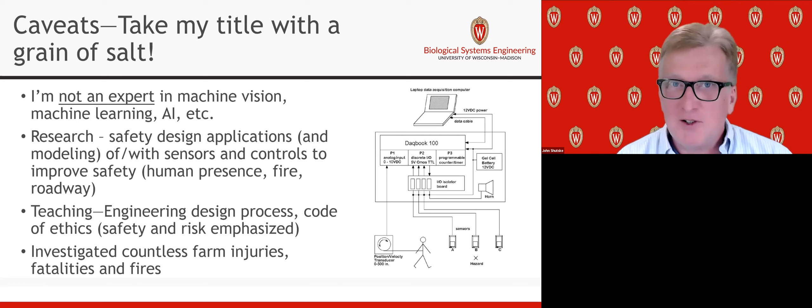I've also done some teaching in the design process. I have been teaching our capstone engineering design as part of our ABET accredited program up here. That includes safety and risk assessment, and we try to follow the engineering code of ethics where safety and risk is heavily emphasized. And maybe most importantly, I've investigated literally thousands of farming injuries and fatalities, and in the case of fires, probably about 4,000 combine, tractor, cotton picker, and sugarcane harvester fires. So if you ever need somebody to talk about machinery fires, you could Google that topic and you'd probably find my name.

So that's my caveat. In the outline of my presentation today, I am going to talk about some of the driving forces that are moving us towards more automation, high automation with agricultural machinery.

Some of these you've heard. I actually watched one of your previous speakers, and you're going to see some of the same coverage. I will try to be relatively brief in that. What I really want to focus on is the understudied barrier that I think safety is, and the safety not only for operators, but for other people who are stakeholders with highly automated agricultural machinery.

I'll talk about risk assessment and control, in particular as it relates to the many, many new standards that are coming into the marketplace through groups like ASABE and the International Standards Organization. I really want to also talk about the fact that when we talk about safety and identifying and evaluating hazards, we need to think beyond just the obstacles that we might find in a defined agricultural or farm field. Many of the standards that we are developing actually specifically exclude some of these hazards, which I think is actually maybe a bigger deal than obstacles in fields.

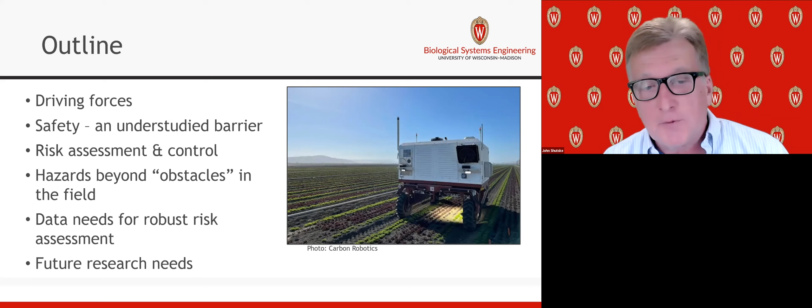I'll talk about some of the data possibilities for doing more robust risk assessment, and then finally wrap up by talking about some of the future research needs, and actually just kind of foreshadow a little bit. Salah and I are planning a conference here for probably the month of November of 2022, and I'll talk briefly about that. So let's begin by talking about these driving forces.

I think many of you have heard of the whole notion of having to double global agricultural production between the year 2022 and the year 2050. So that's what, 28 years. We're going to have to double production on the basis of three main driving forces. Number one is population growth. We currently stand at about 7.9 billion global citizens. That number is going to grow to something close to 10 billion by the year 2050.

The other thing that we know throughout recorded human history is that as people get more affluent, as they have more disposable income, they demand a higher quality of protein. And right now that's most likely to mean animal protein. And then the final driving force is the use of agricultural products for energy and biomass production, those sorts of things. All of this is going to happen while we face these major, major headwinds of things like water: too much water, not enough water, water in the wrong place, wrong time, water quality. And a lot of our water issues are obviously being driven by climate change.

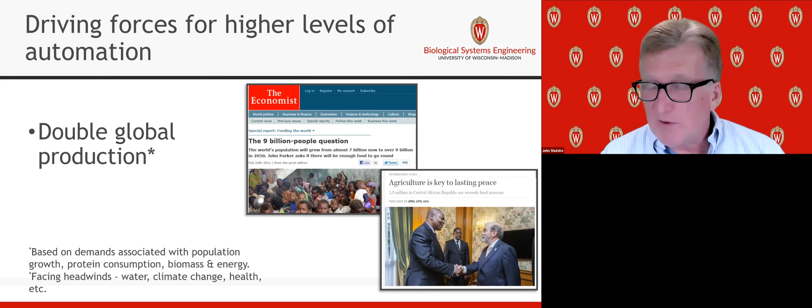And the other thing I want to just mention to you is the impact of more animals on the planet as a result of growing demands for protein also means increased probability of occurrence of different types of diseases, emerging infectious diseases, including things like pandemics and forms of influenza. So we face a number of challenges as we grow our population and double production.

Another thing right now, and I need to say this, my work is nested in Wisconsin in extension under the umbrella of farm management. And right now, probably our biggest farm management issue is this labor shortage that I don't see letting up anytime soon. Interestingly, that is a mix of demographics, changes in our rural communities, the perception of agricultural work, and also, frankly, immigration policy. So a lot of different forces there.

The big driving force that motivates me probably more than anything is the notion of safety, prevention of injuries. Salah and other people are quite familiar, I'm sure, with the concept. We have a hierarchy of controls. When we look to prevent people from getting harmed or killed as a result of exposure to the farm workplace, the safety hierarchy suggests to us that the more we can do to take people out of the equation, isolate people from hazards, that would include agricultural machinery, we're going to have more success at reducing the burden of injuries and fatalities on farms.

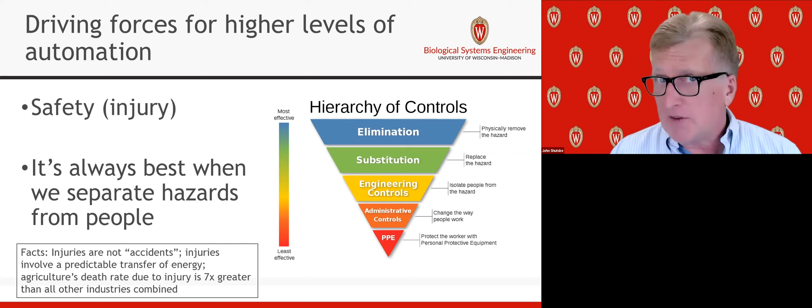But the reality is when we have so many people being killed and injured on farms, those deaths and injuries are a result of a transfer of energy, which is really the responsibility of engineers to control and harness energy for good and to protect people from the bad aspects of it. So I think our terminology and the way we think about these issues is quite important, especially when we think about the fact that agriculture's death rate is 7 times higher than it is in all other industries combined.

We do need to be a little bit careful about this. I believe looking at the ethical aspects, there are a lot of considerations and what I'll call countervailing forces. One of those is the farming culture. Every farmer I talk to in Wisconsin about autonomous or driverless equipment, particularly when we start talking about field operations, tractor, forage harvester operations, there are a lot of people who still really enjoy doing that type of work. Even though some of us might view it as monotonous or boring, it is still part of our culture in many parts of the country.

We also talk about engaging youth. I know that in my own circumstance, I won't mention a manufacturer per se, but if it wasn't for my dad's green tractors, his 4020, his 4240, his 630, and his A, I probably wouldn't have gotten as involved in agriculture, and I probably wouldn't have gone on to be an agricultural engineer had it not been for the machinery that was on our farm in Northwest Indiana. So engaging youth is really important, especially as we look at continuity and succession planning.

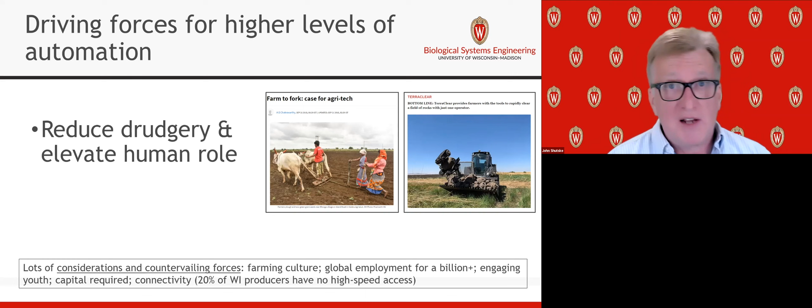There's obviously huge capital requirements, and there's the issues of connectivity. I'm going to highlight in a few minutes a survey that we did here in Wisconsin of over 1,000 agricultural producers. And still, even in a state like Wisconsin, we have about 20% of our farming operations that still don't have access to high-speed internet. So these are all things that I think are going to cause some limitations in terms of the growth and kind of be a countervailing force for those forward-looking trends.

The other one that I find particularly fascinating is, I'm sure some of you probably followed this over the last couple of years, and especially here most recently, John Deere has had a major presence at the Consumer Electronics Show. If you've ever attended that show, in most years, pre-pandemic, we're talking like 120 to 140,000 people, but the focus has almost always been around consumer electronics.

I mean, that's the name of the show, and yet John Deere is really moving toward educating the public, highlighting, creating excitement, as are other companies like CNH, who released their autonomous tractor concept vehicle at the Farm Progress Show, which I think was back in 2016, if I'm not mistaken. I think I first saw that machine in either Decatur or over in Iowa at the Farm Progress Show. So a lot of attention is being paid to autonomy. And I know that that's been one of the focuses of this series.

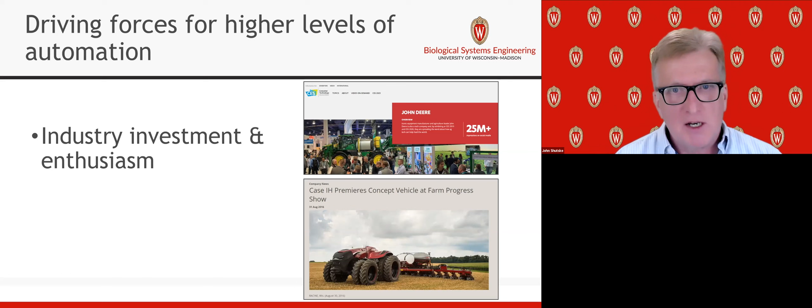As we transition towards looking at safety, I'm going to argue that this is an issue or a need that has been relatively unstudied and undocumented. We've done a lot of research in places like Wisconsin.

Before that, I spent about 17 years over in Minnesota working with injury epidemiologists, doing these really deep dives in literally looking at thousands of farm households and documenting their injuries and their other types of health and safety related issues. But most of that work has been looking backwards in time, obviously.

And when we look backwards in time from now, or from a lot of the work I did in the early 2000s or even in the 1990s, we're often still looking at old machines that may lack appropriate protective equipment, shielding, and those kinds of things. As we look forward, there are not a lot of people around the country who have been studying and looking at these issues of safety and risk with new equipment.

When I first began to write my Hatch project proposal, I think it was in 2017, I was pretty excited as I was doing Google Scholar and other searches to find a chapter in this book called Agricultural Automation. And there was to be a section in here on safety. So I got this book. I waited actually quite a bit of time to get it from CRC. And when I received the book, this is the coverage of safety in this book.

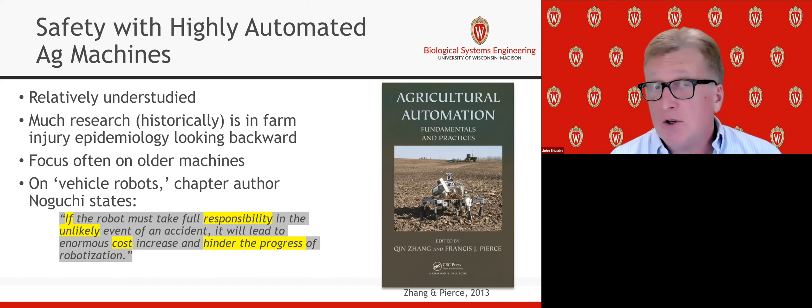I will agree that there will be a cost when injuries and incidents begin to happen. And in fact, yes, these safety related issues could hinder progress. I personally believe that safety and the confidence of not only the public, but definitely owners, operators, employees, people who are stakeholders, absolutely is going to be a driving force. And yet, again, as I suggest, it's something that has just not received a lot of attention here over the last many years.

If you look at some of the things that have slowed the progress, like with autonomous vehicles on highways, there have been a couple of fairly significant events involving Teslas, unexpected events that, looking back retrospectively, could perhaps have been preventable. This particular one is causing some issues with NHTSA, the National Highway Traffic Safety Administration, 354 complaints of random braking.

When we look at the regulatory issues, right now, there are not a lot of regulators that are paying attention to autonomous agricultural equipment. The one exception is California, where we are facing some major challenges. I don't want to quite say a stalemate, but I know that the industry is quite concerned about the direction that California goes. And part of why that's so important is because California is our biggest agricultural state in the country, and probably globally as well, a major, major factor. And I'll come back and talk about that in a few minutes.

But again, OSHA being an occupational safety organization, safety is kind of front and center in terms of their ability to adopt these pieces of equipment. I also want to just briefly talk about the side of policy, politics, and communication.

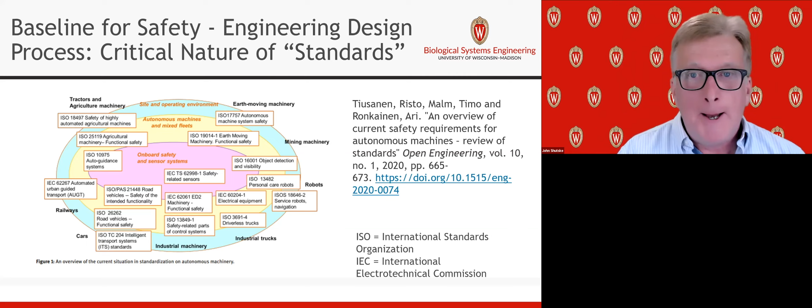We're actually in the process of beginning to inventory all of the things that are out there, paying close attention as these standards get developed, how they can be developed more effectively, how they can be improved. Some thoughts about standards and safety as it relates to autonomous equipment. Number one is that standards in engineering are developed through what we call a consensus process.

The idea of a consensus process is that anybody who would be considered a stakeholder, from the original design engineer who envisions a product all the way to that end user and everybody in between, people involved in financial decisions, insurance companies, the end user, workers, dealerships, people involved in maintenance activities, all are considered to be stakeholders. So just a huge amount of activity.

These standards, if you've ever dug into the details of an engineering standard, and I do this with my engineering senior design class, they're extremely thorough. They're extremely complex, but they also have to be written in such a way that they cover the whole spectrum of possible design alternatives and applications. And so finding content within a standard that applies to my specific application or some unique feature of my product in some cases is very difficult. They're also very densely written, and as a result can be relatively hard to apply.

And for those of you who are interested in outreach, extension, professional development for engineers, I think there's a whole range of different opportunities to better apply these new standards to the autonomous equipment space. The other thing that I want to talk about briefly is that most of these new standards that are coming out rely on risk assessment methods that include, but are not limited to, these two.

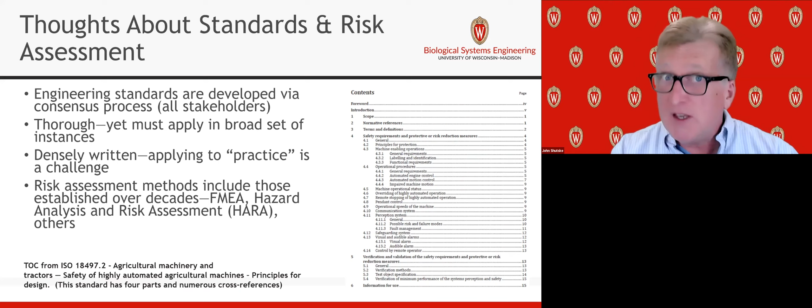One is failure modes and effects analysis. It's a method that's been around for decades. And the other one is called HARA, which is quite similar. HARA is hazard analysis and risk assessment. So these are kind of the foundational bedrock within standards that are the building blocks for safe design of equipment.

So what we wanted to do in our work, I'm just going to pause for a quick minute. I see there's a few chats.

Okay, I think we're good.

What we wanted to do in our work is to learn more about what industry is doing to use these tools, to use engineering standards, and then really how they are thinking about the multitude of risks that are present as a result of their design work with automated agricultural machinery. We started out by doing a survey, IRB approved, so that we could protect the privacy and anonymity of individual engineers who might be working for companies or private sector firms.

We identified a roster of 706 potential respondents based on ASABE, the American Society of Ag and Biological Engineers, and their committee rosters. We looked for people in groups and committees that would be likely involved in design work with fully autonomous equipment. We designed it in Qualtrics, obviously mobile friendly, since we've learned that a lot of people taking surveys are using their phones to do so.

And we asked about their efforts in risk assessment with both highly automated agricultural machinery, or what I'm going to call HAM, as well as traditional, either non-automated or less automated. Our response rate was relatively low, and part of that was we identified a lot of people in our initial 706 who were academics doing teaching work in this area. They might be doing some level of research, but were not directly involved in the design activities that we were going after. But our total response rate was about 18%.

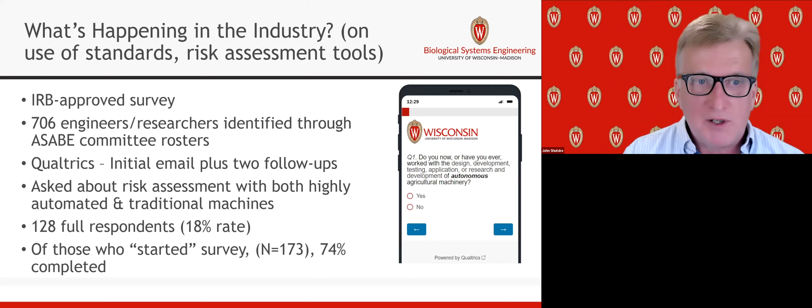We did note that those people who provided us with informed consent, who were willing to participate, in fact qualified in some of these areas. Of the people who started the survey and provided consent, about 74% completed the survey. So these are some of the data. This is, again, the work of Kelly Sandner, who based her master's around this and the other part of this project that I'll talk about.

We learned that, yes, some of the people who are out there designing equipment in the autonomous space are using some of the necessary standards. This series that you see, ISO 25119, is actually a 4-part standard, extremely thorough, and it's also very new, from 2018. About 35% of the people were using that standard. The other thing that's interesting is the heavy use of standards 12100 from ISO and also ASABE 318.18.

ISO 12100 is the general safety of machinery, the general principles of safety in design, including risk assessment and risk reduction. And those techniques employ failure modes and effects analysis. Again, you're going to see why that's important when I come back to it. Interestingly, ASABE 318 has been around for several decades, even before highly automated equipment was a glimmer in some engineer's eye. So it's very basic and it covers the basics of agricultural equipment. So what's most interesting is the two most commonly used standards don't even necessarily apply specifically to highly automated machinery.

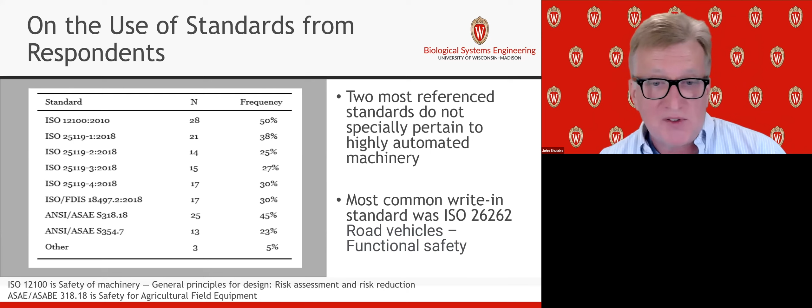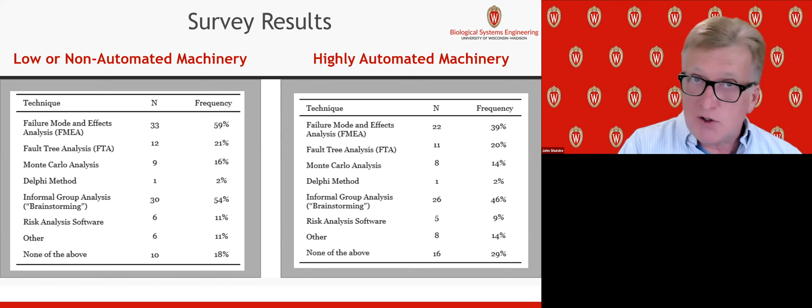And with both groups, the most commonly used techniques included failure modes and effects analysis, as well as informal group analysis or brainstorming techniques, which is essentially a group of design engineers sitting around a table and envisioning all of the possibilities, all of the ways in which a machine could fail, in which an operator could perhaps interact in an unsafe manner with a piece of equipment, and then taking the appropriate mitigation steps to reduce the risk associated with those types of events.

Some thoughts on all of this. The driving force for the research that we have been doing is that with highly automated agricultural machinery, FMEA is still widely used, though less so compared with non-automated design. The other one that is used quite frequently is called hazard analysis and risk assessment, or HARA. And another one, from the data on the previous slide, is called fault tree analysis. Fault tree analysis assumes that we know of a type of incident or catastrophic event that could occur, a top-level event, an unexpected or undesirable outcome.

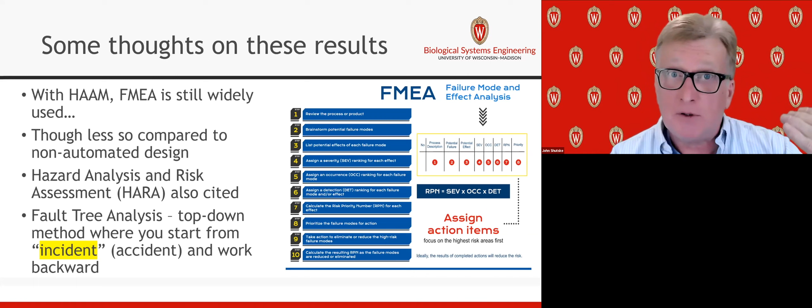And then we kind of work backwards to look at the systems and subsystems that could fail, ultimately leading to that top-level event. And what's important about all of these techniques that are being used and that are also being advocated within these standards is these techniques rely on known estimates or the ability to use previous historical data to estimate the probabilities, the severity, and the detectability of these hazards occurring. Hazards or failures or inappropriate ways in which human beings might be interacting with this equipment.

And so it's pretty obvious then, logically, if you're basing your risk analysis techniques on historical data, anytime that we move into a new paradigm, like fully automated agricultural equipment, we have some real gaps in terms of our knowledge. By the way, the idea of detectability, which is really crucial to the equation that helps you develop a risk profile for a particular piece of machinery, detectability is how hard is it to detect or notice that the hazard is present?

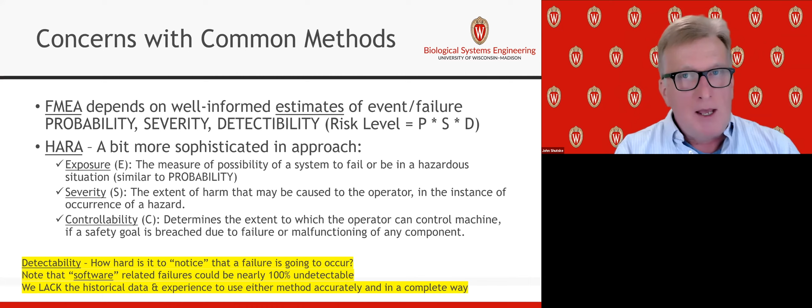What's really important about this is that in software, in many cases, those failures that could lead to some type of event are almost 100% undetectable. So it almost blows apart these equations for quantifying risk estimates for these new forms of equipment. And again, these are the tools and techniques that are embedded in these standards that are coming out and becoming the foundation and the building blocks for engineers.

So at the same time, I'm being critical. I'm saying, okay, these standards rely on these old risk assessment techniques like FMEA and HARA, but at the same time, we need to start someplace, right? And so that's where this idea of brainstorming comes in. Engineering design teams coming together, talking about the possibilities, using what historical data we do have at our disposal, and then basically beginning to put together these risk profiles based on that existing information.

Again, applying standards and actually putting these ideas and concepts embedded in standards into practice is a big challenge. It's a practical challenge. It's also just simply an information overload challenge. I'll also say that other industries, in particular motor vehicle design, are probably going to be quite a bit advanced from where we are because they have had a chance through the slow introduction and integration of some of these highly automated features, even starting with things like cruise control or automatic braking systems or forward-looking radar. They have had the ability to begin to collect some of these data points that allow them to more easily predict risk.

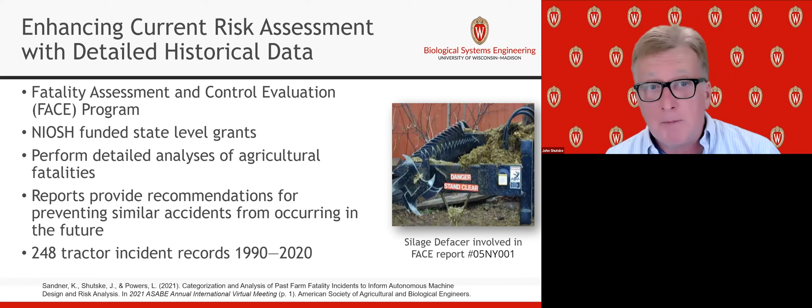Because of the interest that we had in autonomous tractors, we ended up parsing through about 450 total FACE records. We extracted 248 tractor incidents that had occurred from 1990 to 2020, so a 30-year period. We wanted to figure out what we might learn from this data that could be useful in the autonomous space, and how we might use some of this data to better inform design engineers as they evaluate risk.

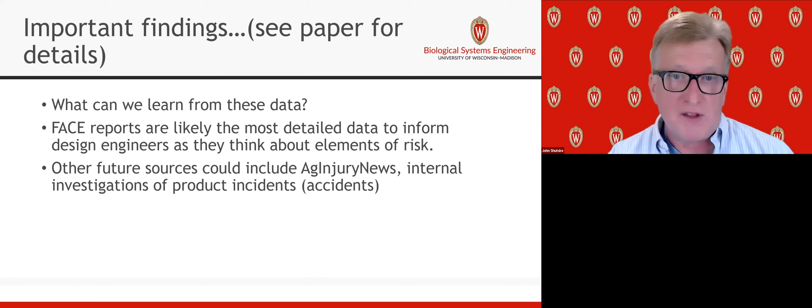And then also we wanted to look at maybe some other potential sources of data that would allow us to fill in some of the gaps and some of these needs. I'm going to go through this rather quickly.

Our tractor analysis found that 61, or 25% of the reports of tractor-related fatalities, involved environmental factors: wet surfaces, undetected obstacles. 130, or more than 50% of our reports, involve some sort of sloping terrain, from large hillsides to even very minor slopes.

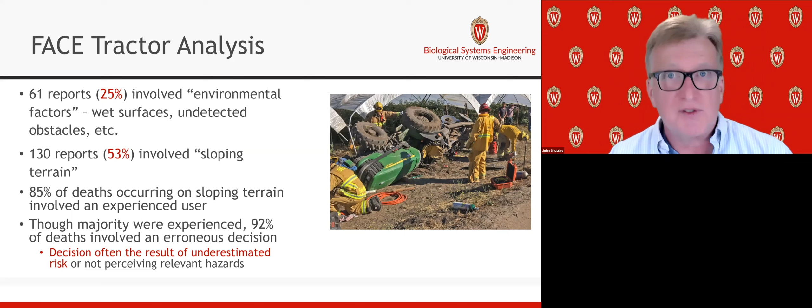85% of the deaths on sloping terrains involved an experienced operator. That is, an operator who did have experience. And though the majority of operators were considered by FACE investigators to be experienced, 92% of those incidents were deemed to have been a result of an erroneous decision, either a decision that was made incorrectly, one that underestimated risk, or perhaps did not perceive the relevant hazards that were located in the environment.

So the idea here of looking at this FACE data is actually twofold. First of all, we know from just this little analysis of these 240 incidents, highly automated machines must incorporate systems and components that are at least, if not more, accurate and dependable as compared to an experienced human operator. Because we know that even experienced human operators will fail to perceive some of these hazards in the environment.

We also felt like, after looking at this data and really parsing through it in great detail, that the FACE data possibly could be used to bolster those imagination-provoking design team conversations that are used to identify, evaluate, and mitigate risk.

And then probably most importantly and most exciting, and where we probably will go forward with this, is that we could potentially use FACE data and other similar data sets that are out there to inform these conversations, but possibly also to inform machine learning, inform artificial intelligence through training sets and other products that are being developed. Why not start with a robust set of data that's out there, that's free?

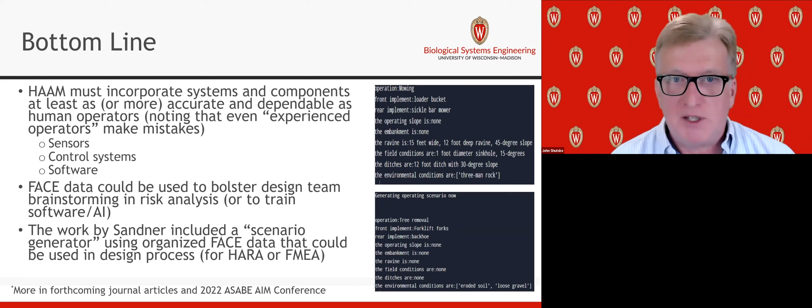To summarize this work, and then I'm going to just take a little bit of a pause and see if there are any questions. From Kelly Sandner's work, we learned that industry people are, in fact, using standards, old standards and new standards, even though they are difficult. The standards scene is evolving quickly. It's really difficult to keep up. The resources necessary to keep up are significant.

And one of the concerns I have is if you work for a large multinational machinery company, you probably have a full-time staff of people who just focus on standards compliance and standards development. Smaller companies that are in this space, and there are a lot of them, as you guys know, may not even be aware of standards, and if they are, perhaps lack the resources to be able to use these tools effectively.

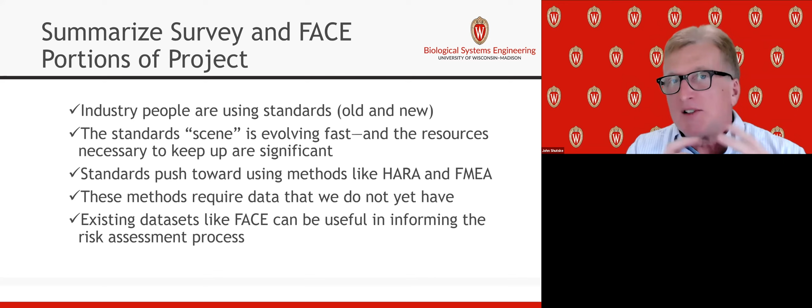Standards continue to push these ideas like HARA and FMEA. However, again, my point in all of this is those techniques advocated in standards rely on past and historical data that we don't have with these newer forms of machinery. However, at the same time, we feel that we can use some of these existing data sets to actually do these tasks and perform them effectively.

One last thing before I open it up to some additional questions and also talk about some more issues that we've identified. Our work has focused largely on larger machines. The risk assessment for smaller machines like swarm robots and other swarm types of machines will necessarily be different. And from a safety perspective, might actually provide some improvements. You have less mass, less velocity, so we're talking about less kinetic energy. Many of these machines are going to tend to be a little bit less complex.

We also know that if we have multiple machines out working in a field, there's less downtime risk. I'll talk about downtime here in a moment. And there may be other production benefits that also reduce risk, like less compaction, as an example that's commonly cited in the literature. Also, our current emphasis has largely been on safety during field operations.

And that, again, is a little bit limiting, as I'll talk about here in a moment. The standards that we have reviewed largely focus on obstacle detection in a relatively defined, secured field environment. But I believe we need to begin to think beyond just that isolated field. With that, I've got this last bullet that says, but what about?

I'm going to pause there for just a moment and see if there are any questions or comments. And then it might also give me a little bit of an opportunity to take a drink of water here.

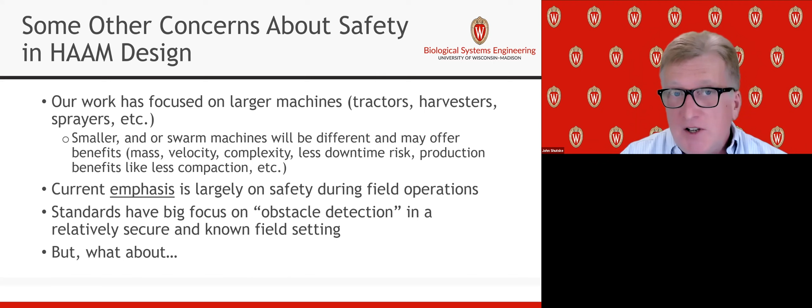But what about environment? So when we talk about obstacle detection in fields, relatively easy to do, right? I mean, if we have a rectangular field, regardless of the size, with clearly defined boundaries that's flat with no sloping surfaces like we found in the FACE data, probably not a big deal. But anytime we move beyond that, less than ideal, we do have potential problems. I've had some questions about our FACE data. Our FACE data was largely about tractor rollovers.

And people have said, well, it's good if we pull people off of tractors and we have highly autonomous tractors that are pulling spray rigs, spreading manure, doing tillage or planting operations. If it rolls over, from a safety perspective, not that big a deal. Well, what if that machine is carrying a load of fertilizer, a load of manure, a load of chemical? Obviously, we have environmental risk. Unfortunately, the existing standards that are being developed in many cases specifically exclude environmental risk.

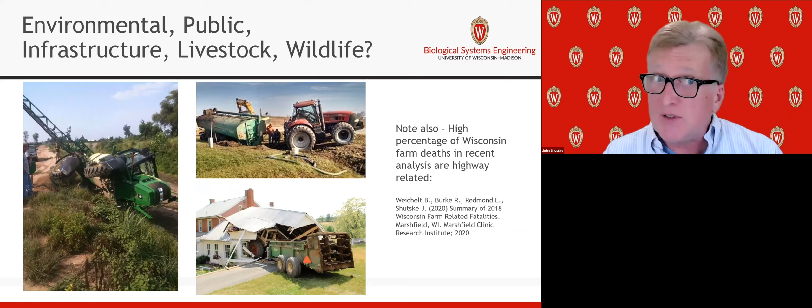The other thing that I'm just going to say is if I'm going to go out and spend $1.25 million to buy a new tractor that's fully autonomous, the last thing that I want to have it do is roll over in a field, because we're probably talking about hours, if not days of downtime. So even when you pull the human being out of the equation, some of these things are problematic, even though we may not injure people. Similarly, the existing standards that are being developed exclude the impact on animals, livestock, wildlife. So I think some gaps there that we need to be thinking about.

We also know that when injuries occur on tractors and other types of machines, they often occur during what I'm going to call non-routine circumstances or situations. When I did a lot of this work back in the 1990s and I would talk with farmers, they'd say, yeah, a lot of times when I've gotten hurt, I'm just kind of out, the term was mucking around. I'm out repairing something, or I'm out taking a part off, and I end up with a severe eye injury, or I fall while mounting or dismounting to perform a repair.

So obstacle detection is one thing, but we also need to be thinking about what happens in terms of safety and risk when people are involved in some of these other peripheral, non-routine circumstances and situations. Another thing that I think we need to look at even more closely, this is where I did my PhD work. I looked at about 4,000 tractor and machinery fires, and we looked at sensors and detectability and automatic suppression systems.

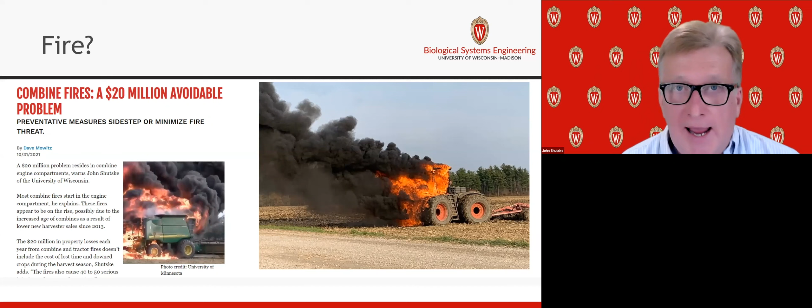Again, if I lose a $1.2 million machine that is out fully operating by itself to fire, this is definitely something that we need to be thinking about and considering in the risk assessment process.

And the other big one is downtime. Again, if we're going to give up a traditional set of machinery that's used for a row crop operation, or here in Wisconsin, we're heavily into corn silage and hay production, if we're going to move towards autonomy, we need more assurances that downtime is not going to be an issue.

Even with traditional equipment, the loss of a day during critical planting seasons or harvest seasons can run into the thousands of dollars. And if we have downtime as a result of software failure or hacking or just basically a malfunction of the machine, it is a risk that I think we need to much more thoroughly consider as we do this type of work.

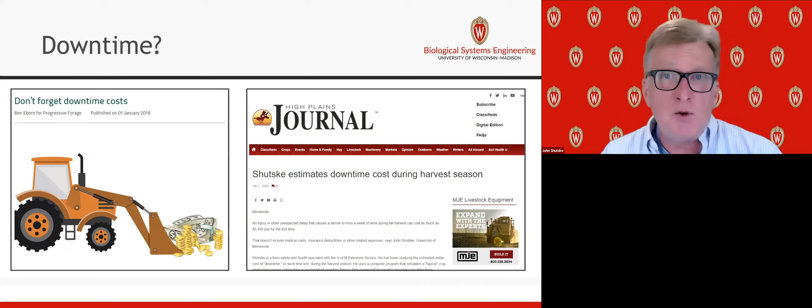So when we talk about farmers investing in high tech, investing in highly digital, highly automated equipment, it is going to change the nature of the type of producer we see, their comfort level with technology. The cost, I think, is a big factor. And in this work, when we looked at the issues of safety and security with growers and producers and dairy farmers, we didn't even bring up the idea of software failure or of hacking. And obviously there are safety and security concerns in terms of intentional as well as unintentional impacts on software.

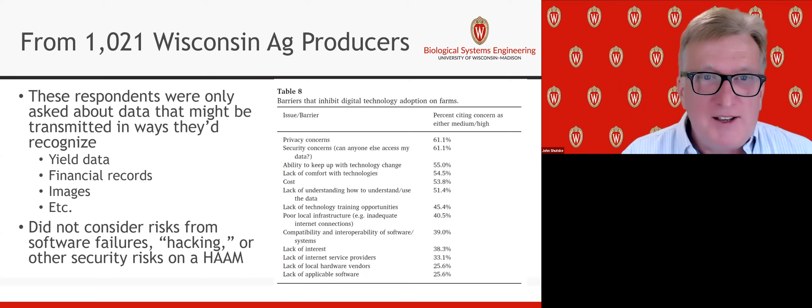So where do we go with all this? Again, on the safety side of the equation, there is a flurry of activity nationally and internationally. Obviously, industry knows safety is a key. And if we don't get answers to some of these questions, we are going to be somewhat limited.

Again, as I've tried to stress with you here today, engineering standards are very necessary, but they do need to be applicable. They need to be usable. Right now, it is like a massive jigsaw puzzle, quickly evolving, something that I think is going to present continued difficulties for the industry, especially small industry players that don't have the resources to actually fully utilize standards.

And then finally, I think that there are new methods needed for risk assessment where we're trying to predict probabilities and severity. So I think as we begin to see these types of applications move out into actual use, we need to figure out, are there ways to share incident data? Perhaps public-private partnerships where we maintain the privacy of individual companies and individual operators who are hurt or injured.

I think we can also use existing data streams. The FACE reports are one. Another one is a group called Ag Injury News, which is maintained out of the Marshfield Clinic up at Marshfield, Wisconsin, the National Farm Medicine Center.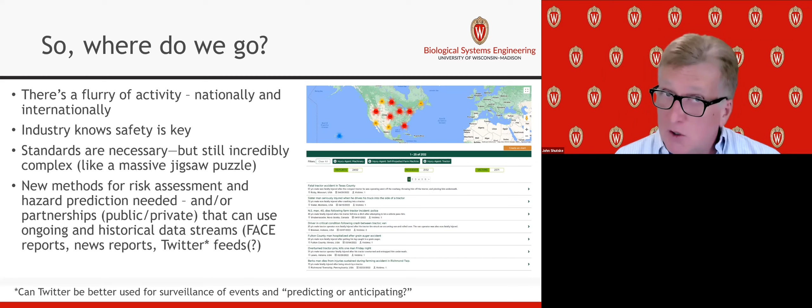And the other thing I think we might be able to use down the road is Twitter or other forms of social media, where we might be able to use long-term streams of data for surveillance of events, but also possibly predicting or anticipating events that might occur in the future based on data that's presented by users of the equipment and also potentially manufacturers.

From Kelly's thesis work, we talked about the development of standardized training sets for artificial intelligence in agricultural machinery. I think it's quite possible to use some of these data sets that are already out there to help us with the scenarios that we talked about, developing risk assessment tools that quantify risk based on varying levels of highly automated machinery. I've really only talked here about fully autonomous versions, but there will be a whole spectrum of automation applications.

Also developing software that references a machine's surrounding environment and conditions, and then examines those against historical reports and makes decisions in real time. For example, is machine X currently operating in a situation that looks like an old event Y from the FACE data, and can we learn from that on the go during field operations? Again, I think we need to amend existing engineering standards to include maintenance, transportation.

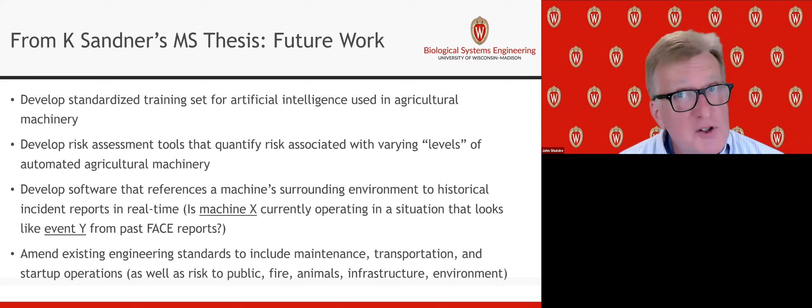Transportation on public highways is something I haven't even really talked about. Also, startup operations, as well as risk to the public, fire, as I talked about, livestock and wildlife, infrastructure, and the environment. Just as a little bit of promotion here, we do have some next steps planned that are going to look at a lot of these different issues that I hopefully have been able to identify and explain a little bit here today. Salah and I are working together.

Salah is actually leading an effort where we'll be doing a symposium early winter, late fall, probably with around 50 to 100 people, all of the different stakeholders, researchers, regulators, insurance companies, especially the ag machinery industry. And we hope to really look more fully at these issues, identify next steps around issues of risk and safety, standards, how can we do a better job, regulation, policy, effects on the workforce.

Again, the training needs, the impacts on economics locally in communities, the workforce needs in terms of training, investment in education, dealing with people who might be technologically averse to actually adopting, and then again, prioritizing things from a research perspective.